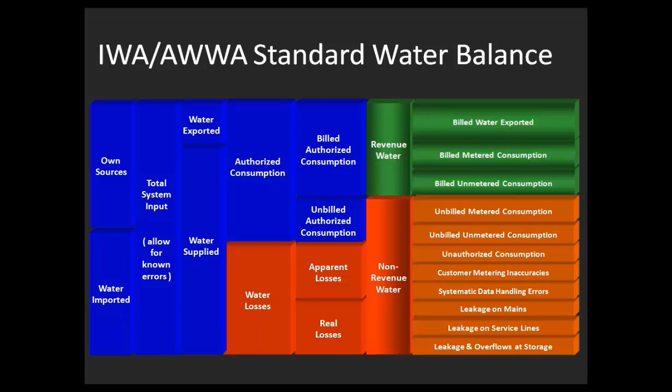So the goal is that we will not have any unaccounted for water anymore. So in the past, like maybe 5 or 6 years ago, you would hear terminology that said, how much is your unaccounted for water? We really want to get away from that terminology. We've learned a lot, and we'd really like to have all the water fall into various categories, because that allows us to better respond to what's actually happening in our system.

So if you ever hear anybody saying unaccounted for water, you can politely tell them that, hey, that's old terminology, we don't do that anymore. We do a water balance to try to figure out where our water is going.

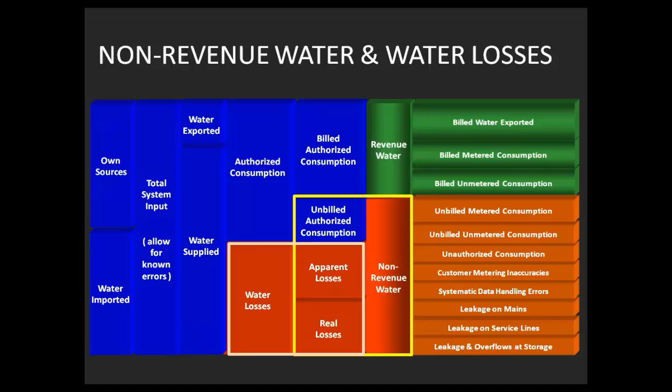And water losses can be distinguished from non-revenue water by unbilled authorized consumption. So the unbilled authorized consumption is the difference between the non-revenue water and water loss. So you'll hear both of those terms when you talk about water auditing. You'll talk about non-revenue water and water loss. So just remember they're not exactly the same. The difference is what we don't bill, but we allow people to use.

So let's spend just a moment talking about the categories that make up non-revenue water. So the first category is unbilled authorized consumption. So this is water that we allow people to use, but we're not sending them a bill. So the type of water that might be in this category is a municipal use. Maybe you're watering a park, maybe you have water going to City Hall. That type of use would be unbilled and authorized.

It might be your firefighting folks, where you're not charging the fire department, but you're authorizing, of course, them to use the water. It also includes water that the municipality or the water utility uses as well. So it could be flushing water or process water. So all of that water would fall into the category where you're not billing, but you're allowing somebody to use.

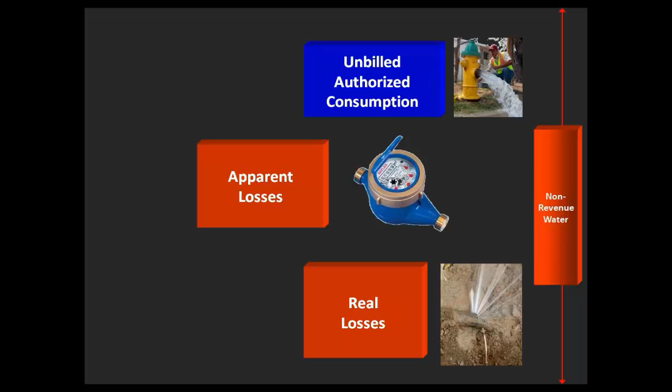The free water audit software can be downloaded from the American Water Works Association. You will be asked to register, but whether you're a member of AWWA or not, you can register and you can download the software. We do have the website here. And version 5 is the version you want. It gets updated every couple of years. And it will look like this when you download it.

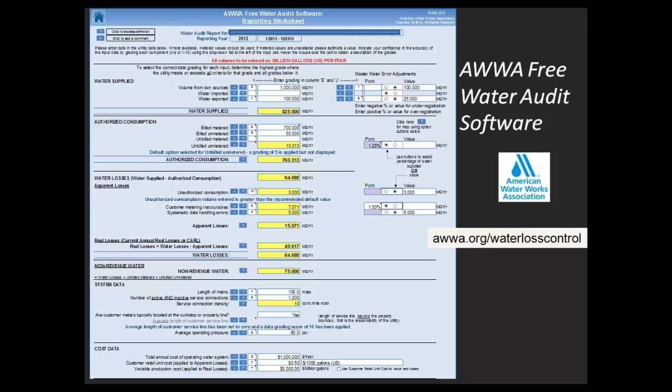It is a spreadsheet that's based on Excel, so you will need to have Excel on your computer. If you have an extremely old version of Excel, it may not perform quite right. If that happens, just try to find a newer computer. Maybe you have to go to a library or somewhere else to find a computer that has a newer version of Excel. But primarily it will run on almost all recent Excel versions, and it again will look like this when you pull it up.

So the place to start is on the instructions worksheet. You'll notice several tabs when you open up the software. Many of those tabs are background information for you, helpful tips and that sort of thing. There's only a couple places where you actually have to add information yourself. And the first one is the instructions sheet.

And the instruction sheet is where you're going to put in your identifying information, contact information, and then you're going to select the year. It can either be a fiscal year or a calendar year. You can choose either one, but once you choose that, you should stick with that from that point forward to make it easier for you to compare one year to the next.

If you pick a fiscal year or financial year, it will ask you your start and end dates for the audit. And then finally, you're going to have to pick your reporting units. So basically what you want the water audit to read in. Millions of gallons is probably the most common, but there are a couple of other choices for megaliters and acre feet. So you choose the units that you want the whole water audit to be done in. So the first page is just a couple of data entry points.

The next one is the reporting worksheet, which is where you're going to be entering all of your volume inputs and financial inputs. So this is primarily where you'll enter all of your information for the water audit.

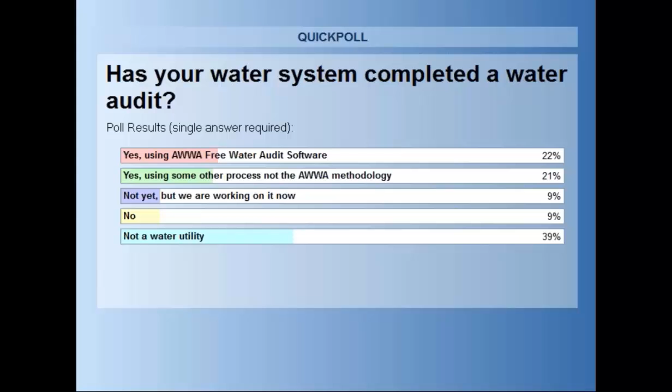Okay, so it looks like about 22% have already done a water audit using the software and 21% have done it using something else. So that's almost half of us have done some kind of process with water auditing, and that's great. Okay, so we'll go back to the presentation now.

Part 2 is where do your data inputs come from? So we talked about the fact that on the reporting worksheet you have to enter your data. So where do we get these values from? So we're going to start with the left-hand side of the audit, and you'll notice that each of these columns is exactly the same height, and the idea of the water balance is that all of the columns add up

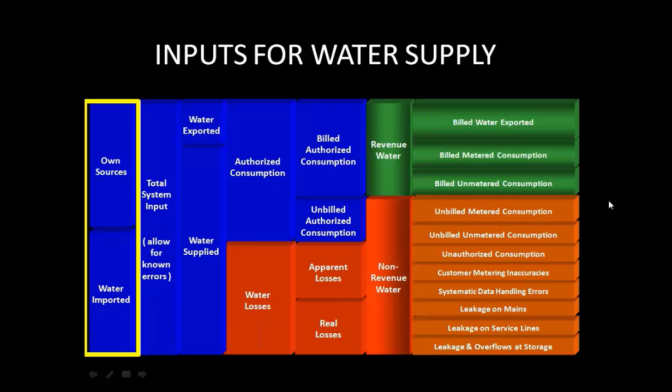to the same amount. So we start on the left-hand side, we start with where our water is coming from, working over to the right, which tells us where our water is going, and each column adds up to the same amount, which is how we balance, and the reason it's called a water balance, so that we're trying to balance the same numbers across the board.

So we start with our own sources and water imported, which become the most important inputs. And you can see again when we talk about the fact that we're balancing across the way, these values will set the amount for the whole rest of the audit. So if these data points are wrong, it will flaw your entire audit. So these are the ones that are the most critical or most important to having an accurate water audit.

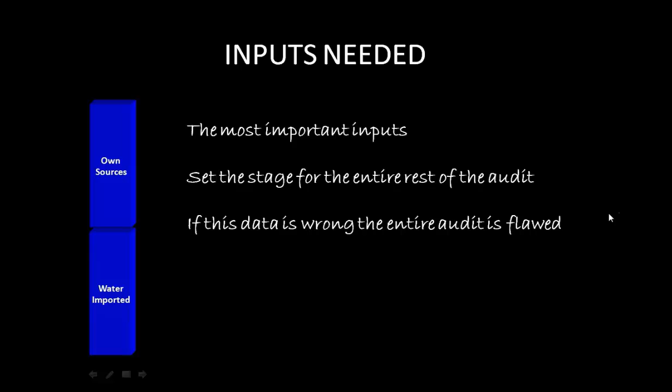So where might our data come from if we're talking about our own sources? Typically we have master meter records that we're going to use for that information. And that could be a well, it could be a spring, it could be a surface water source, and hopefully you have some way to meter each of your sources. And it's best if every single source has its own meter rather than having several sources coming together into one meter, because you really want to know from a process standpoint exactly what's happening at each well.

Hopefully you're taking some kind of daily readings as the best case scenario. If not, maybe it's weekly or monthly. Hopefully it's no less often than monthly.

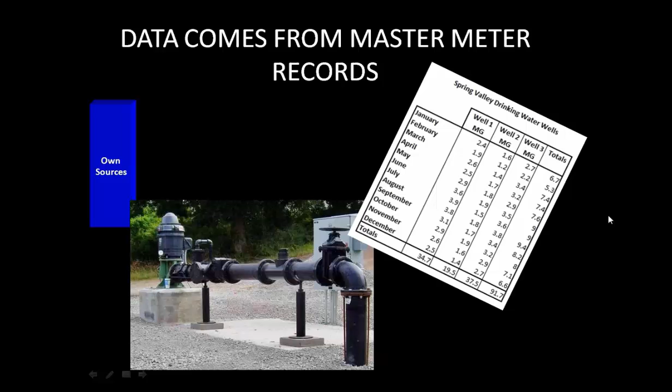And then what we want to do is take all of those values and add them up to get one number for the total amount of water that we're supplying for our system. So we want to know the entire year, what are the millions of gallons that we produce from all of our own sources, which could be several wells, it could be springs, it could be surface sources, it could be a combination of all of those, and we want to total them all up and say what is the one value, the total millions of gallons for the year.

So what are some possible concerns with this data? If the meter is having heavy use, if it's got a lot of wear on it, it may not be reading accurately, it may be reading too much or too little. The meter application is another concern. Perhaps we have the wrong meter, we have a meter that's designed for a different application and we put it in the wrong place and it's just not going to read well for us.

Another possibility is that we've installed it incorrectly, and typically meters want to have some straight pipe before and after them. A rule of thumb is about 10 diameters of straight pipe in the front and 5 diameters in the back. So if your meter is not having straight pipe at the beginning and end, but rather it has an elbow, it has a valve, it has something right up against it, it may not be accurately reading the flow. So even though the meter itself might be fine, the application or the installation that it's in will make it so that it's not reading the flow properly.

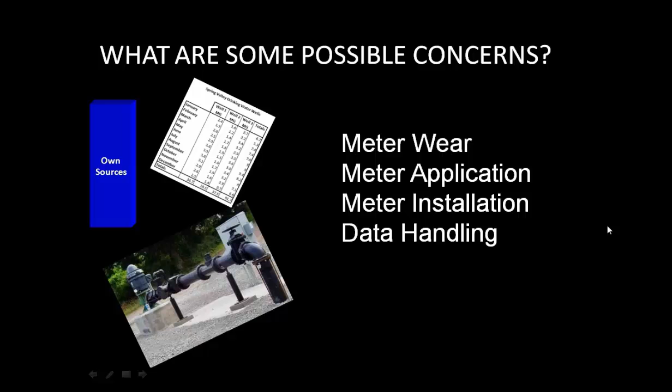And then the last one we need to worry about is data handling. Do we have the SCADA system sending our information correctly? Is somebody recording the results correctly? Are we making any mistakes with our data handling? Do we have a spreadsheet where all the columns aren't adding up correctly? So we have all of those possibilities for why our data may not be correct.

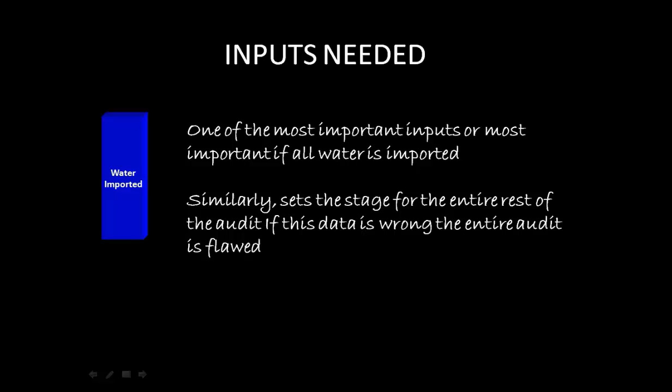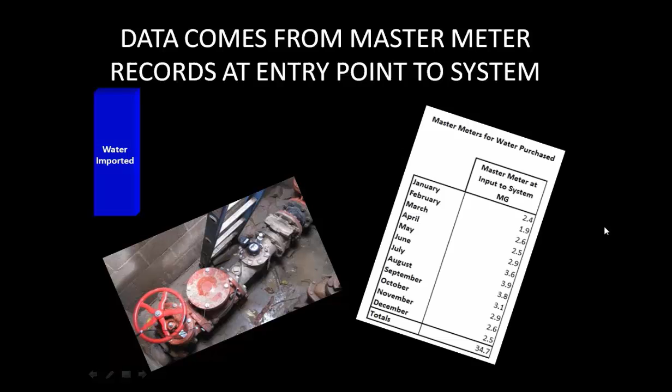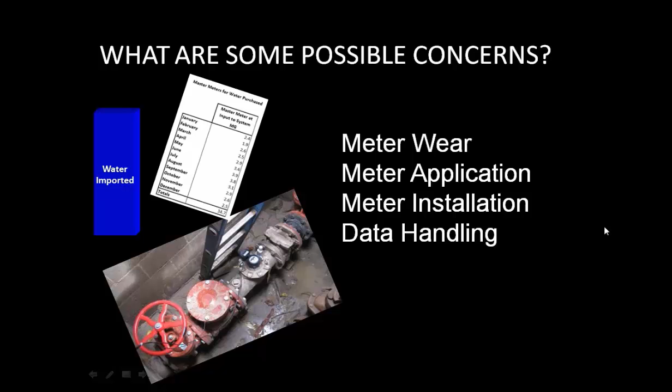So another input we need is the water we import. If we're buying water from another utility or a wholesaler, same kind of idea, we would want to know how much water that is, and we would get that information the same way through master meters. Maybe we're reading them, maybe the system that's supplying the water is reading them. We want to make sure that we have the correct information there regarding the master meter. Same kinds of concerns. We have meter wear, meter application, meter installation, and data handling. So the same sort of issues will come up with our water imported.

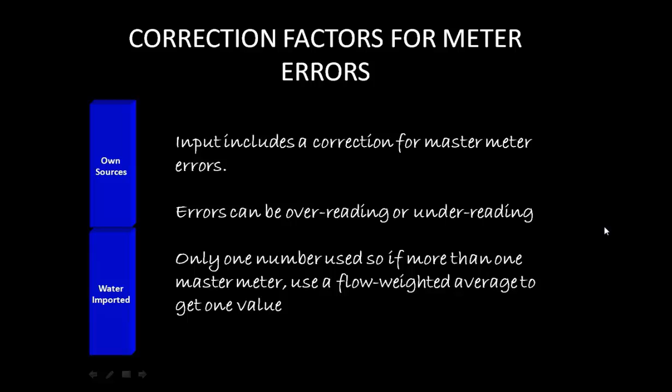We mentioned how there could be incorrect information for our master meters, both our own sources and our water imported. So we can account for those errors if we know what they are. So the meter can be overreading or underreading, meaning it's reading too much water or too little water. And we can test our meters. We can have somebody come in and check them, see how far off they are, and then we can enter a number into the software to correct for the meter errors. Similarly to some of the other portions of the software, you can only enter one number, so if we have multiple meters and we know what the error of all the meters are, we would use a flow weighted average to get one value for how far off our master meters are.

So where would we enter these input values in our software? This would be in the water supplied section of our software. You see a block there for volume from own sources and water imported. And you would enter again the total for the year for the volume of your own sources and water imported. And then over on the right, we have the opportunity to enter those errors that we talked about. You can either enter the percent that it's off or the value in terms of millions of gallons that it's incorrect. And it will automatically calculate in the yellow box. It will take into consideration your amount of error to calculate the water supplied value.

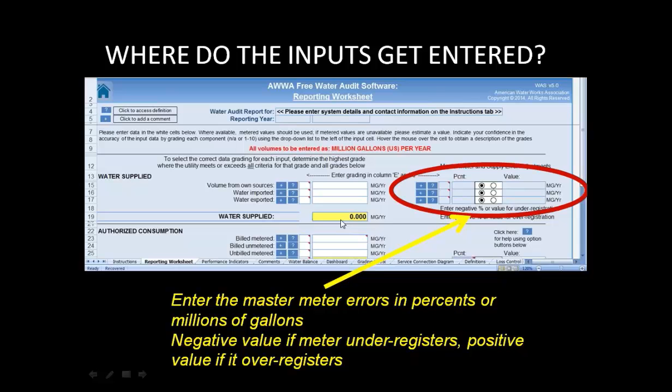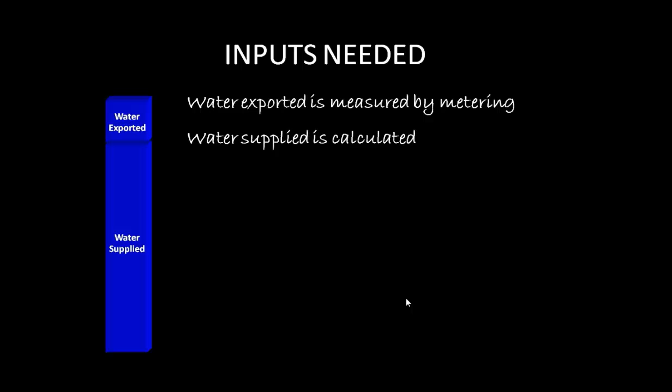We also need a value for the water we export. So if we actually export water to another utility through a master meter, we would want to know what that master meter reading is for the year and how much water. And that allows us to calculate the total amount of water we supply to our system. So we add our own sources to the amount of water we import. We subtract out the amount of water we export, and that equals the total amount of water we supply to our customers.

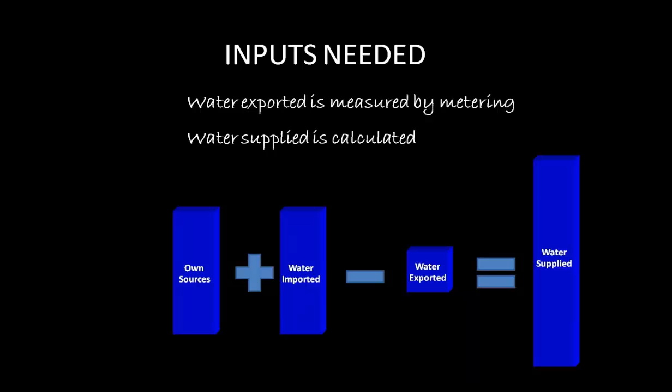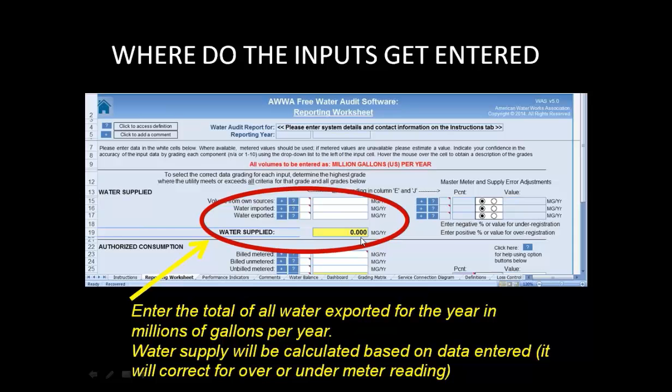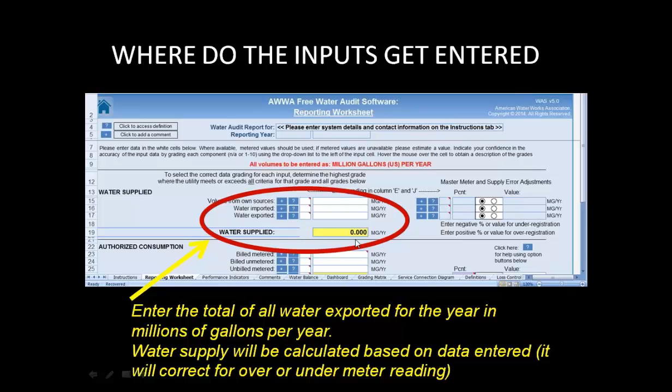So again, when we put in our export values along with our volume from own sources and imported, this yellow box right here will calculate how much water we're supplying. So in this software, anytime you see a white box, you have an opportunity to input information. Anytime you see a yellow box, that's a place where the software will calculate a value for you.

Some other inputs we need are billed metered consumption. So this value represents the water we're supplying to our customers. We're billing them for it, we're metering for it, so the little meters in front of a commercial customer or a meter in front of a house. This is that flow that we're talking about. This value most likely comes from a billing system, billing software. You will have to become friends with whoever at your utility deals with that billing process.

You're going to have to manipulate the data somewhat because billing software was set up to bill. It was not set up to do water auditing. Maybe as water auditing gets more popular in the future, they'll change billing software so that it's more amenable to helping you get the right information you need for your audit. But at this current time, you really have to do a little bit of work to get the value that you want. So you're going to work with your billing folks to get out the total amount of water that they have billed for the year.

The next one is billed unmetered consumption. So this flow would be folks that you send a bill to but you do not meter. So if your utility does not meter any customers, all of the customers would end up here. If your system meters several customers and some who aren't metered, you would have people in both categories. If you have stopped meters where you estimate, that could show up in billed unmetered consumption.

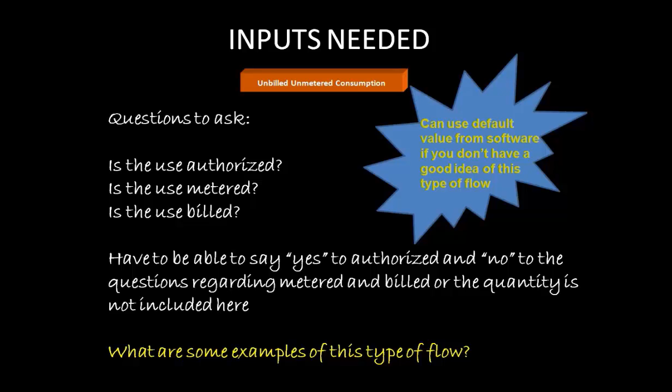So it's a little harder for you, at least initially, to figure out what these values are. So there is a default value in the software so that you don't have to use more sophisticated estimating techniques at a beginning stage. You can just go ahead and use the software.

So where do these inputs get entered? Right here under authorized consumption, you'll see the billed metered, billed unmetered, unbilled metered flow. And then the unbilled unmetered actually gets entered over to the right. As I said, you could use the default, which is 1.25%, or you can enter your own value. You would just click this circle to be able to use a value instead of the default percentage.

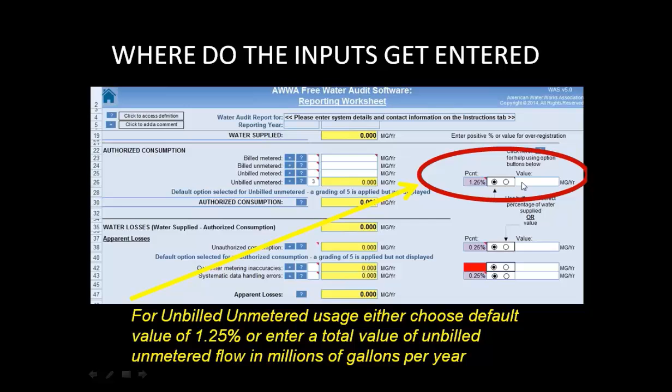The defaults show up in gray. You cannot change the default values. So if you don't want to use the default, you have to click this button and use a value over here. Other inputs that are needed are unauthorized consumption. This is water theft. This value either has to be estimated the best way you can, or you can use a default. And again, this is people who are stealing water from your system.

Customer meter inaccuracies is another data point that you have to enter. You only enter one percentage. Generally it's from 1 to 10%, and it has to cover what you think the overall average meter inaccuracies are from your system. And typically you're going to get this by actually pulling a statistical sample from your utility, looking at different ages and flow ranges and types of meters in your system, check them, see what the errors are, and come up with an average value.

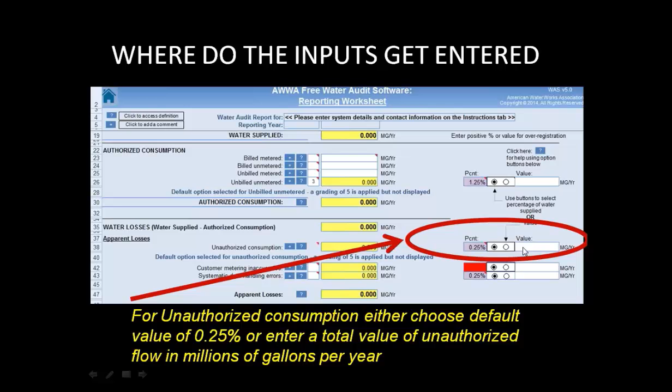And then the systematic data handling errors are the last one of these types of inputs. You can use a default value if you don't really know that much about what the errors are in your system with data. So where do these go? Unauthorized consumption shows up over here. You can again use the default value, or you can toggle to this button and use a regular value of total millions of gallons. For the customer meter inaccuracies, you'll see it in red. You'll enter a number from 1 to 10% in that red box, or you can switch to over here and enter millions of gallons. And then finally, data handling errors either is 0.25%, or we can put in a value.

So how does the software come up with non-revenue water? It takes that total system input that it calculated, subtracts out any water we export, subtracts out our billed metered consumption, and subtracts out our billed unmetered consumption, and then it comes up with a total value for non-revenue water. The non-revenue water, just as a repeat, includes unbilled authorized, apparent losses, and real losses. So our unbilled authorized consumption, again, is our unbilled metered use and unbilled unmetered use. Apparent is unauthorized consumption, customer meter inaccuracies, and systematic data handling errors. And our real losses are leakage on mains, leakage on services, and leakage and overflows at storage tanks.

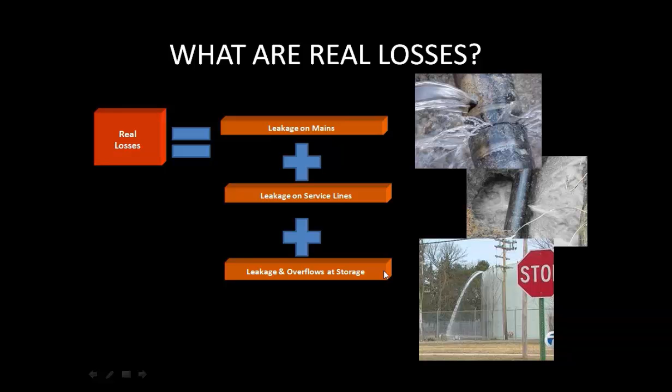The real losses are calculated. There is nowhere in the software where you are going to enter an estimate of your total leaks in your system or how many breaks you fixed or anything like that. The way this works is it gets to the real water losses by looking at the other inputs that you made, and it calculates it. So it takes our total system input, subtracts out all the authorized consumption, subtracts out our apparent losses, and then that will give us the value for real losses.

That's why things like the total system input and those beginning numbers are so important, because the real losses are going to be based on that information that we initially input. If we're way off on our total system input, it will either make the real losses higher or lower than what is actually happening, and that can really throw us off.

There are a few other inputs that you have to enter. Some of these are system data type issues like length of mains, number of connections, customer service curb stop locations, and average operating pressure. And the average operating pressure is one number for the whole system.

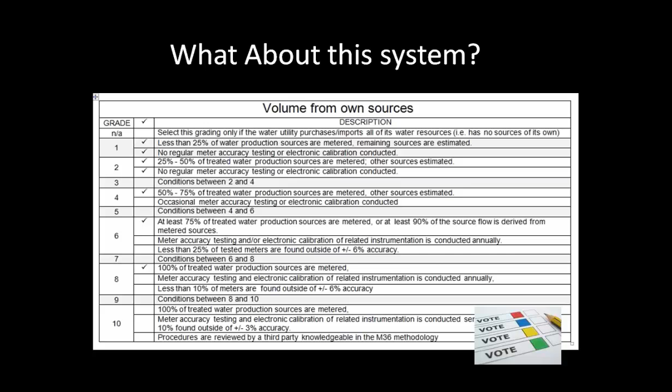Just giving a couple more seconds. People are still voting. Okay, we did pretty well on that one. A little more confusion. This one was a little bit trickier, but most people picked the 3. Let's go back to the presentation.

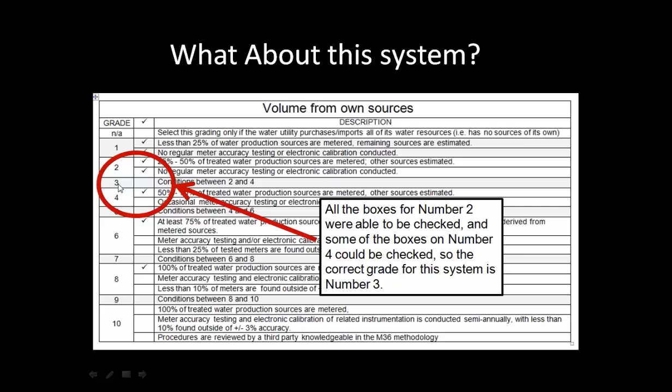So in this case, all the boxes in number 2 were checked, and one of the boxes in 4. So this system is a data grade 3. What was a little bit trickier in this case is that we were actually able to check one of the boxes on 6 and one of the boxes on 8. So you might have been a little confused thinking that it was a higher data grade because they did have at least something checked. But remember, all the boxes in that particular data grade must be checked, not just some of them. So this particular utility would be a 3.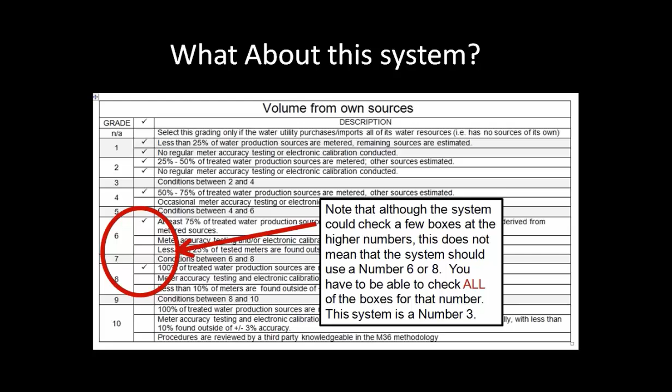So now the question is, what is the right data grade? Knowing that each one of them goes from 1 to 10, is number 10 the right data grade, a number higher than 5, a number higher than 7, or any number as long as it represents the true situation? So we have a poll question up. If you can just take a moment and choose the answer that you think best fits what the right data grade is. All right, most everybody got the right answer, which is any number as long as it reflects the true situation. So we can go back to the presentation now.